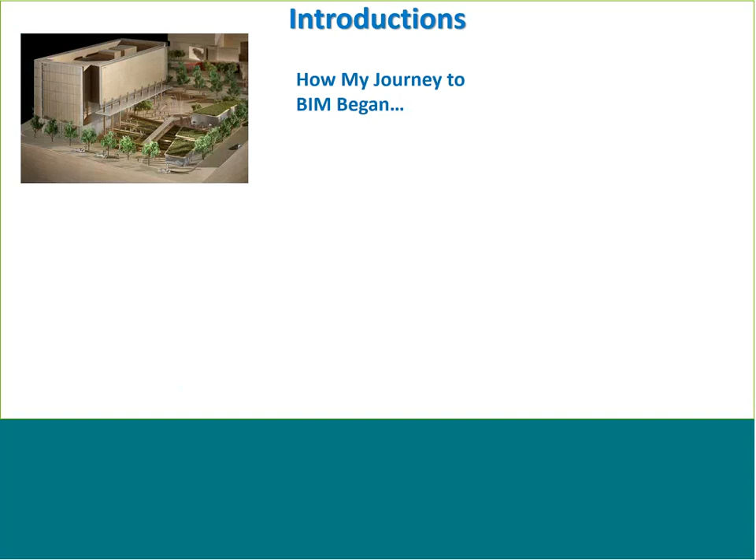When I was a wee one back in my elementary school days, I went on a tour of the local high school just before entering high school, and when I went into the drafting lab—way back then that's what it was, a drafting lab—I saw a bunch of cardboard models, kind of like we see here on the screen, even complete with the little fake green grass and the trees that you get from your local train hobby store. I thought, that is really cool. That's what I want to do. I want to be somebody that gets to make those cool models.

So once I started high school the following year, I began right away on the technical side and started to learn AutoCAD. Back then, it was on floppies. As you can see from that little arrow there, the entire AutoCAD program came on 4 floppy disks.

If you're a wee bit younger and don't know what a floppy disk is, there's a great example. They didn't hold very much information. Those entire 4 floppy disks held less than 5 megabytes, not gigabytes, megabytes of data to put that whole program together. As you can imagine, it's much larger now.

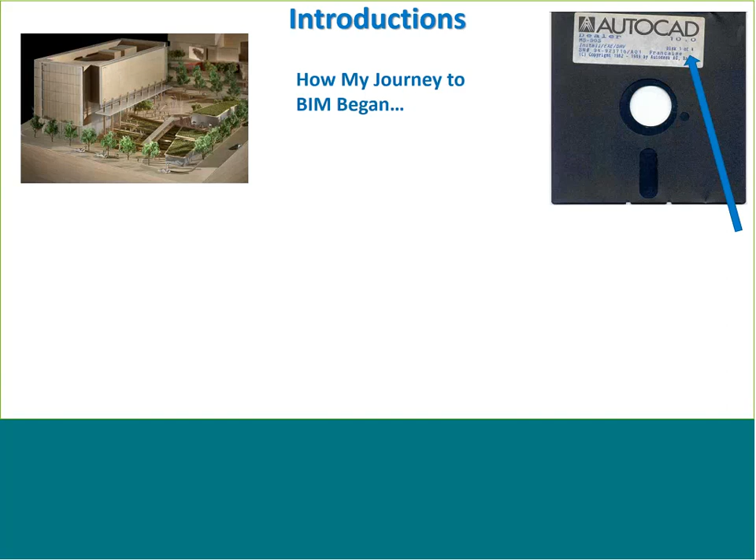One of the other things that I was taken aback by and just sort of floored by with the new school technology we were using was something called a plotter. As you can see down here, back then we used what we called pen plotters, and what it actually did was pick a pen from the little carousel there and draw each line with the pen. This was sort of earth-shattering back at the time.

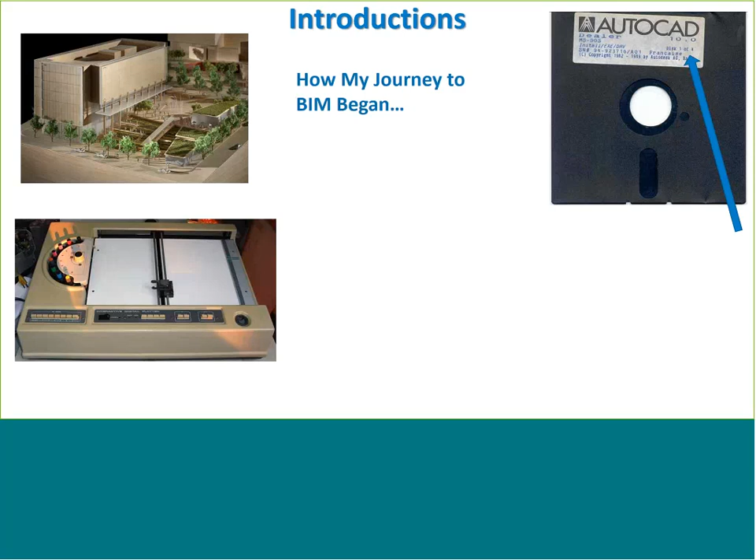The downside was if you happened to have 2 or 3 or 12 lines sitting on top of each other, the pen plotter would actually retrace those lines 10, 12, however many times you drew it, and then you'd puncture the paper. Once you punctured the paper, you'd have to restart the process again. So while it was cool technology, it was slow and prone to having not data breaches, but paper breaches.

The other new technology we were starting with there was a tablet—not the tablets we know and love today, but a digitizer. Instead of having to use our keyboard shortcuts with AutoCAD, we had the ability to pick the little icon for this digitizer, and the particular command we selected would happen right away on the screen. That was sort of super cool technology at the time as well.

Thankfully, the digitizer wasn't around for very long, because then they moved it from the digitizer onto the screen with our toolbars inside of AutoCAD, and we were good to go from there.

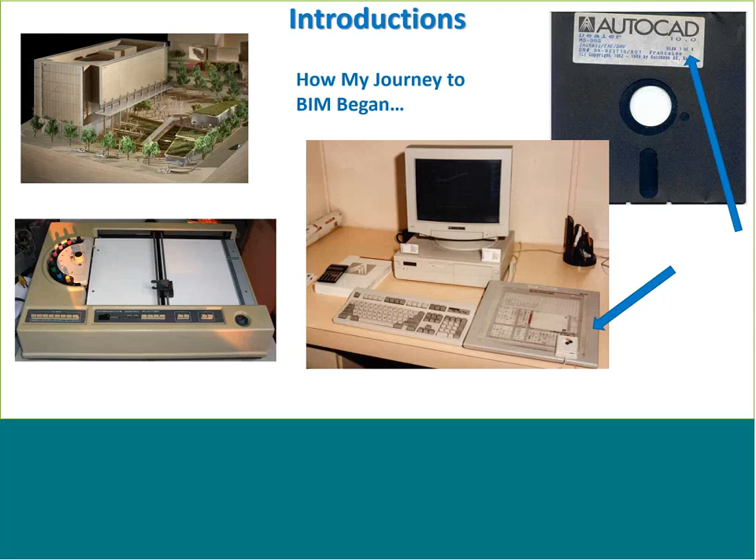So you're asking me, why is Carl taking me on this journey down memory lane to talk about this old, antiquated technology? Well, the reason I did that is because of a disclaimer. The name of this particular presentation is How to Make You a Better Contractor, and I would be remiss if I didn't tell you that I'm not very good with a hammer and a nail or any of those particular things.

And my wife can certainly attest to that.

So with this presentation, I'm not going to teach you how to drive hammers or wield a wrench or any of that stuff, but I do hope that I'm able to lighten your view on the technology that's out there and how that can make you a better contractor in the 21st century.

So some of those definitions that I talked about.

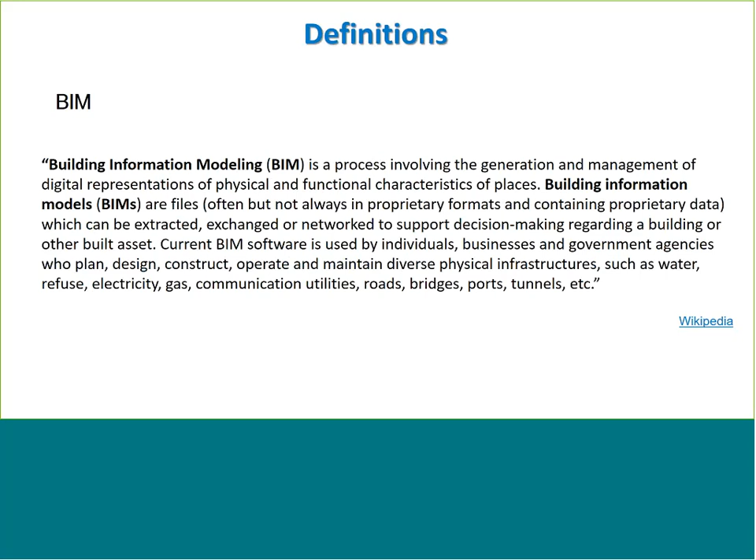So BIM, of course, building information model or modeling, depending on how you use it. You're going to hear this term a lot. It's an industry buzzword, and it's something that's going around the entire globe. So instead of working with 2D plans, we're now working with 3D plans and database-based information.

You may also hear VDC, and in fact I threw this term out when I was running through my bio. What it stands for is virtual design and construction. While some people will sort of interchangeably use BIM versus VDC, they tend to be a little bit different. VDC deals with the actual contractor or construction end of the digital model we're working with, and we tend to get a little more detail inside there, whereas with BIM we tend to start with the design aspect to make that information possible, and it would move into possibly a VDC realm.

IPD, integrated project delivery. This is our holy grail. This is what we're shooting for, where we get all the parties involved very early on inside of a project, the owner and his team. We create some sort of shared risk, shared reward environment, and we all work together for the better outcome of the project, and hopefully a better reward at the end.

And the last one, not necessarily a new definition, but new in the industry as far as how it's being used and adopted more and more, which is design technology. Design technology kind of takes all of that stuff and puts it together. So we're not just talking about working with design models, we're not just talking about working with software like Revit. We're talking about working with all the technologies that come with design and construction, so virtual reality, augmented reality, drones, laser scanning, all of that stuff comes together.

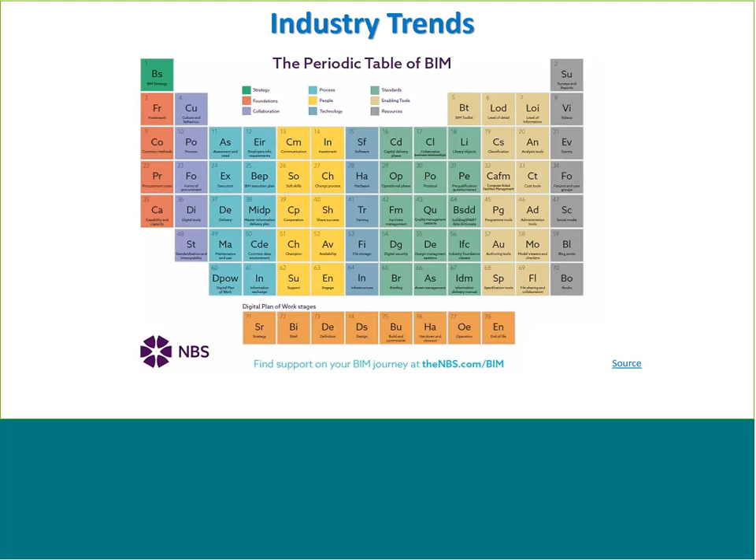As you can see, it comes from the NBS, or the National BIM Standards. They're out of Australia, I believe, but that could be wrong. But if you click the source, it'll take you there, and not only do they have a great article that goes along with this image, but they talk about each individual one. The real reason I like to put this into my presentations and talk about it early on is because of the very first element, BS.

Everyone usually chuckles and goes to the wrong BS definition, which is why I like to see that it pops out that it's actually BIM strategy. And that's absolutely 1000% true. But as you're starting out, you need to make sure you have a strategy working forward, whether we're just starting with BIM, putting our toe in the BIM water, or working on an entire IPD project.

Now, depending on where you are in that life cycle, you may just see your model is just that, just a model. As we get through building, and more importantly get into operations where the owners are in place, we're going to realize that it's just data. The model is great, we can do great things with it, but more important is that information lying within the model and what we're going to do with that data throughout the life of the project and the model itself.

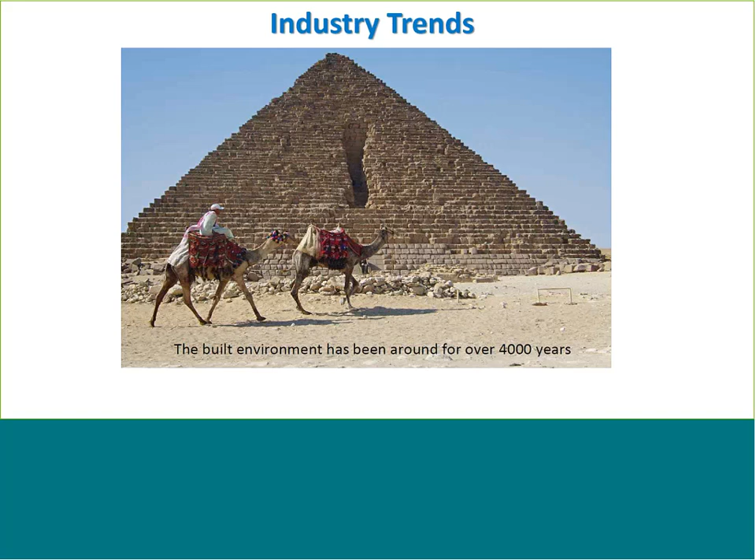So when we're talking about contracting, the way that we build things really hasn't changed a whole lot over the last 4,000 years. We see how the pyramids were built way back then, and they're still standing. They didn't have computers to use BIM, but they had a process where they planned, they scheduled, they executed, and they built. Same general idea. But we'll also see that the way we've done things, even as technology has changed, hasn't.

So we take a look at these images here on the screen where we've got these brick layers over the years and the centuries, and the way that they actually lay brick hasn't really changed much. You'll hear this a lot when we talk about the construction industry in general, how we've stayed the same for hundreds of years. We haven't really had a lot of change. And while that's definitely starting to move, that needle is rising, more technology is coming available, and there's more adoption, it's still quite slow.

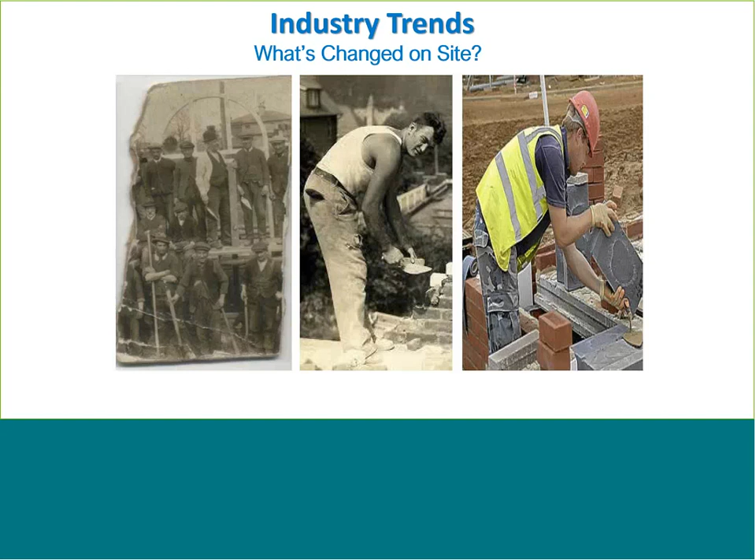So why is it slow? Why don't we change? Why don't we quickly accept this new technology and get on the bandwagon, as the case may be? Well, of course, there's always our friend cost. It's going to cost us a lot of money to make these changes. Maybe it will, maybe it won't. It's all relative to the time and money that it's going to save you.

We just said, our friend time. We don't have time, we're very, very busy. We don't have time to learn new software or new hardware or to take training. And of course, my personal favorite, he says in a sarcastic tone, we have always done it this way. How many times have you run into this when you've tried to implement or bring anything new into your workflow? Well, this is good enough because we've done it this way for 20 years. Why should we change? Well, hopefully at the end of this presentation, you'll have an answer to that question.

So why should we change? In case you can't wait to the end, let me give you a few of those answers right now. Better communication. We are no longer just sending emails or writing things on charts or putting things on clipboards and taking them into the job site trailer, putting them in a file. Hopefully someone takes that file, transcribes it, can understand our handwriting, makes those changes and passes it along. We have much better ways that we can communicate and send information now.

It improves the workflow, and the kicker here, we can start working with the actual data, not a version of a version of a version of something that may be the data that we want. Increase productivity - once we get over that initial learning hump, we will find that there's a benefit for this technology and this workflow, which is why we're doing it.

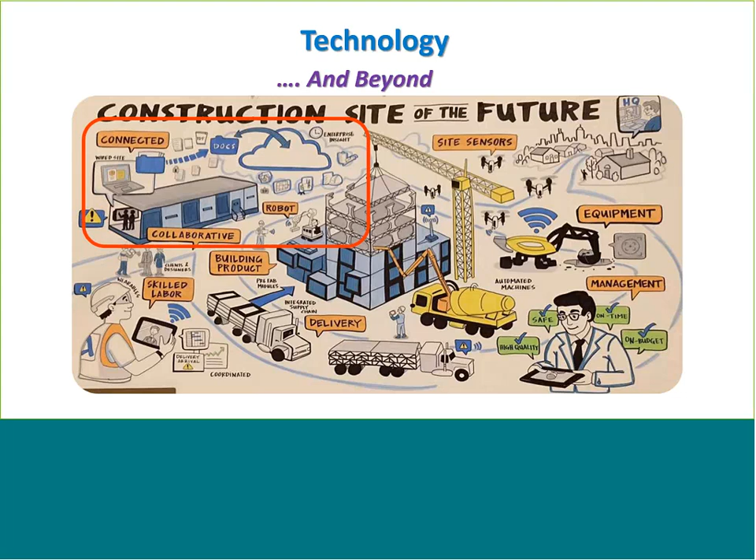And all of that is going to nicely tie this all together and lead us into talking about BIM 360 and why that is going to help make us all better contractors.

So BIM 360, that's only for BIM managers. It's just a bunch of point products with fancy names, and you need a whole bunch of stuff to get it all in one. It's only for contractors. Nobody's going to do it if they're not working with 3D and if they're not working with BIM process. If you're still working with 2D, it's not for you. It's only on iOS, so if you don't have Apple, you're out of luck. And really, it's just glue, right? Like it's just glue. Well, of course, none of that is true.

But those are a lot of things that I run into when I'm talking with people about what BIM 360 can do for them. There's a lot of misconceptions, information that's not quite right, or maybe they just haven't really looked into it.

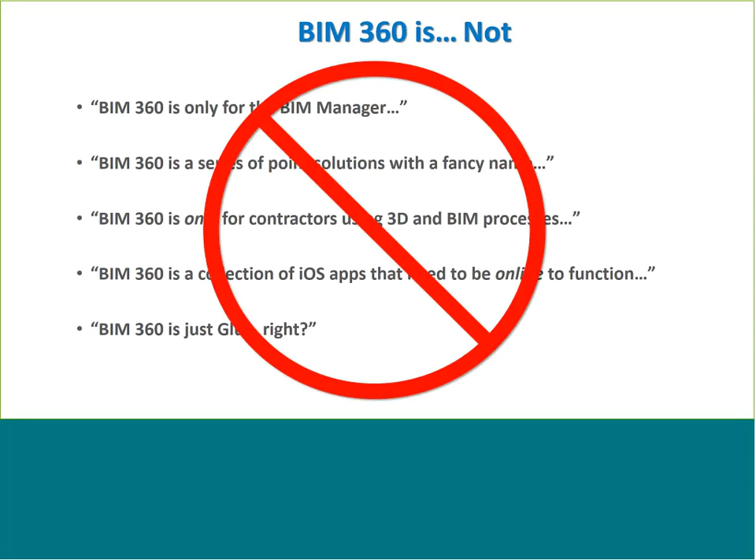So what does BIM 360 do? Well, what it does is it helps give you the ability to access your data anytime, anywhere. Now, of course, there's always going to be tiny caveats to this in that if you have internet, you can access your data. If you're on the field and you have your Wi-Fi connection, Wi-Fi or cellular, and you can access that, then you can access your data.

But even if you're outside of a cell or Wi-Fi area, you can still use this information, and as soon as you get back into your connected environment, you can transfer that data to the rest of the project team.

It's easier to deliver our projects because we have the right data at the right time. We're always connected with our team. We have this database of information that we're working on from the beginning of our project now right through to the end. And as we have more people come into our project, we can provide them access to it.

So we're not reinventing the wheel. We're not sending several different versions of our data. It's all in one spot. And of course, because we're working with data, the underlying information in these models and documents that we're going to be talking about, we can now do analytics.

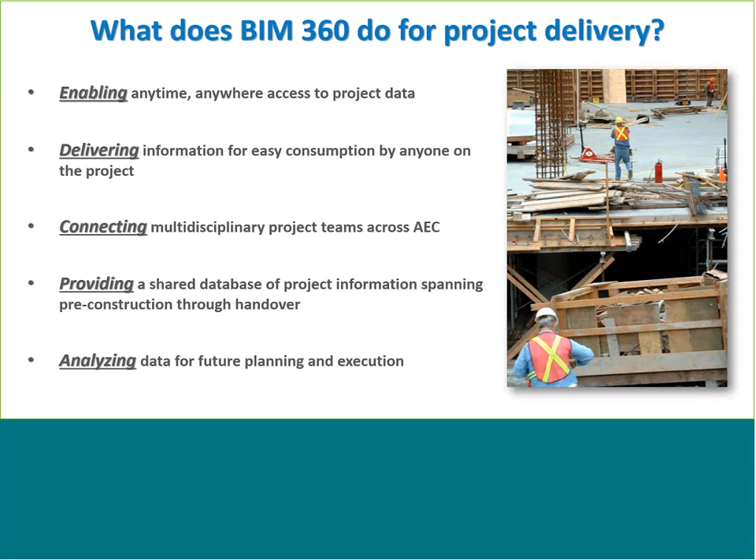So how are you currently dealing with your collaboration, design issues, construction issues, RFIs? How's all that stuff done?

So is it something like this? We have connections where we're using an FTP site, we're sending emails, perhaps we're putting all the information on a USB stick and carrying it across town to somebody else, or maybe we're even a little further ahead of that and we're using a basic client like Dropbox or Box or something like that to store information.

What we want to do is get away from that workflow and move into that central source of truth. A common data environment is a term that you're going to hear a lot, where all of our information is in one location. We know where it is, we know what version we're working on, and we know how to get to it. And also, just as important, we know who was the last person to upload, make changes, or touch our information.

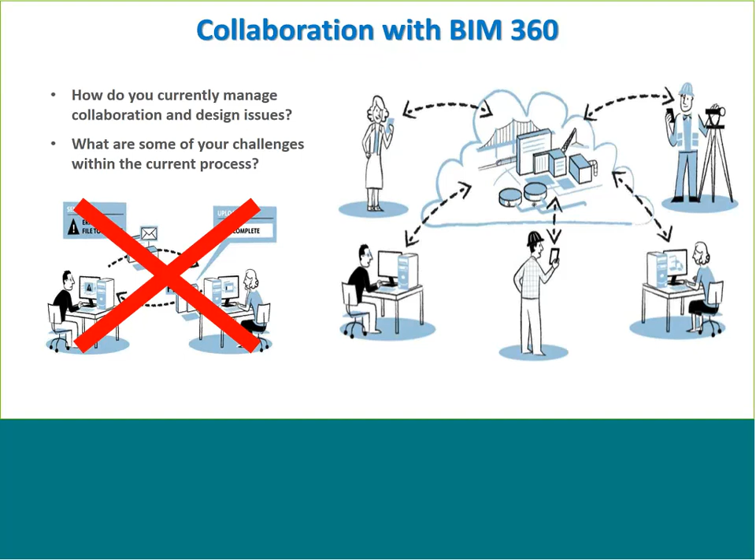So now let's dive into some of the products that actually fall under the BIM 360 moniker. We're going to start with Glue, one of the original products that came out, BIM 360 Glue, as well as BIM 360 Field.

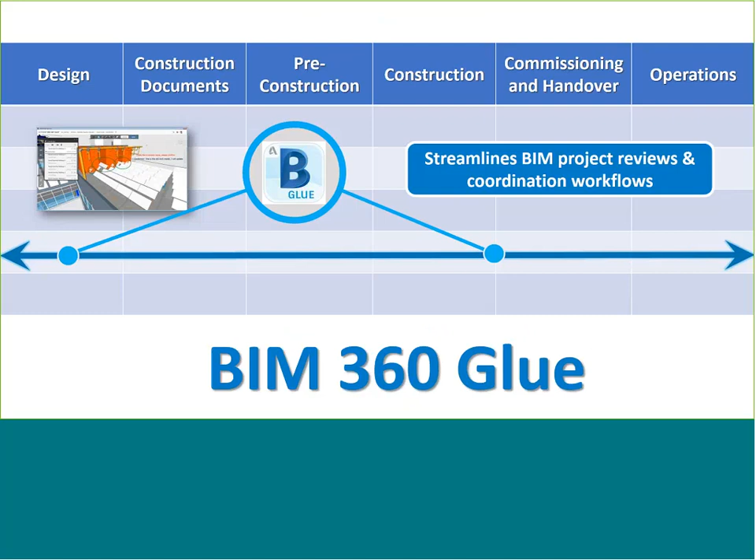When we're working with Glue, it gives us one-click access to BIM. That means when we're working in this environment, whether we're BIM savvy or not, we can simply get an email from someone working on the project, and all we have to do is click that little link. When we click that link, we're taken directly to that particular view inside of Glue and can see what we were meant to see, whether it's a markup or an issue or what have you. We have access to that right away, and we can see it without having to really know how we got there or why. We just click the link and we're good to go.

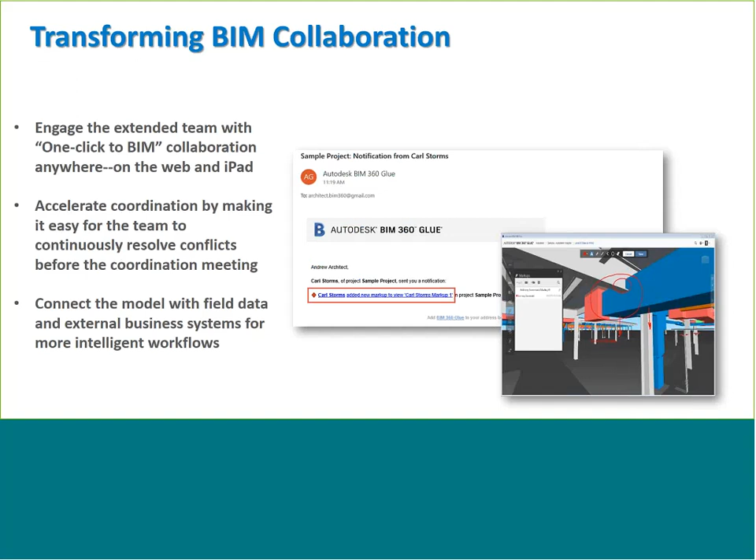We have the ability to see clashes earlier in the project, which is part of that IPD type of thing. If we're all getting together earlier on and finding stuff virtually before we're doing bricks and mortar, building stuff in the ground, we're going to get things fixed at a much cheaper rate. It's easier to change a model than it is to move some beams and some bricks and some mortar.

And of course, this information is available on a mobile platform. So whether it's on our iPad on the site, or on our laptop, or on the computer in our job shack, we don't have to be chained down to our desks in the office now. And even if we're not the ones that created the data—if our consultants from the architecture and engineering world are sending us the data through Glue—we can access it as we need it.

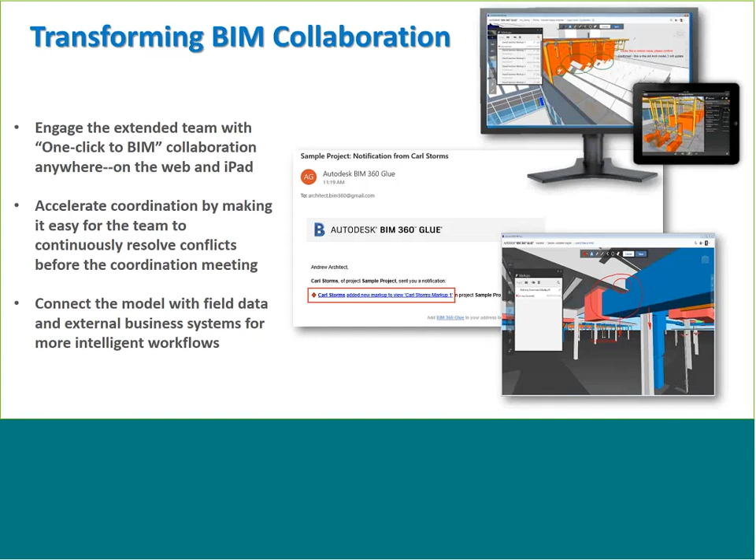One of the other nice things about working with Glue is the fact that it has add-ins. So if you happen to be working with, or your partners on the consultant side are working with, Revit, Civil 3D, Navisworks, or AutoCAD, there's a direct plugin for Glue inside those software packages, which means we can quickly work with that data and make changes inside of that platform. In this particular slide, we see there's an issue with a Revit model. They'll get a clash notice from Glue, make that change, save it, and from right inside their authoring tool, send that information back up to the Glue project.

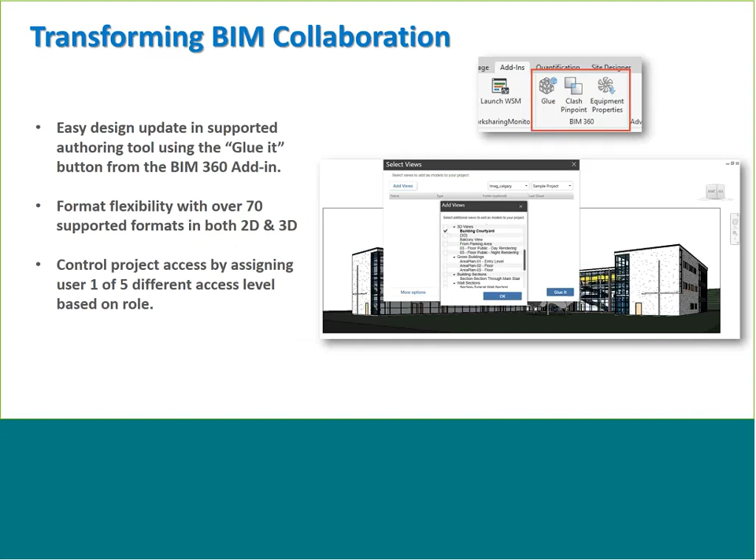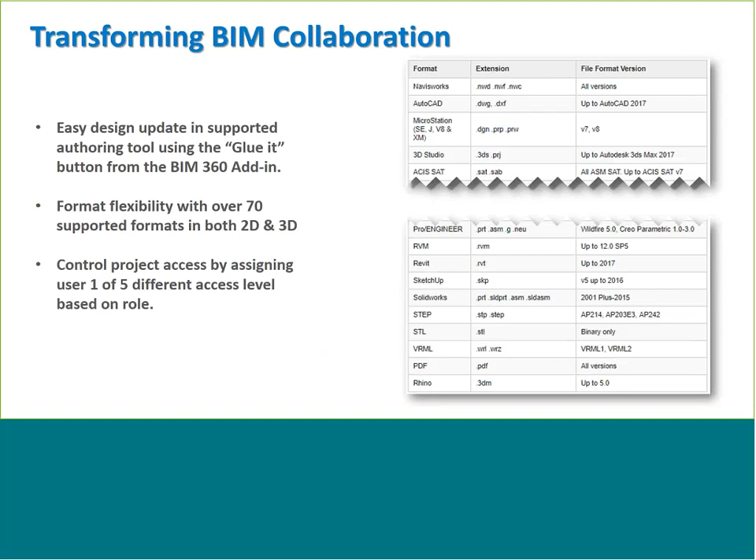We also support several different types of data, very similar to working with Navisworks. There's a whole bunch of different data types that we work with, so we're not just talking about Autodesk platforms—we're talking about a lot of 3D platforms that are out there that we can work with. This is just a partial list of what's available. As you can see, it's not just 3D information that we're working with. And of course, we have the ability to control access to who's working with what inside of our project, so that's always nice to know that we have that ability as well.

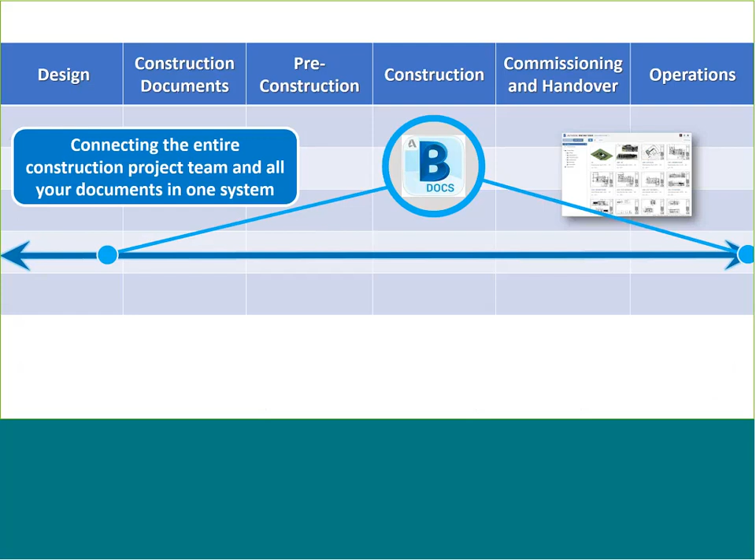So now let's take a look at BIM 360 Docs. Here's where Docs sort of resides inside of the workflow. This kind of almost touches the entire life cycle, and as we see, will be the backbone for the BIM 360 platform moving forward.

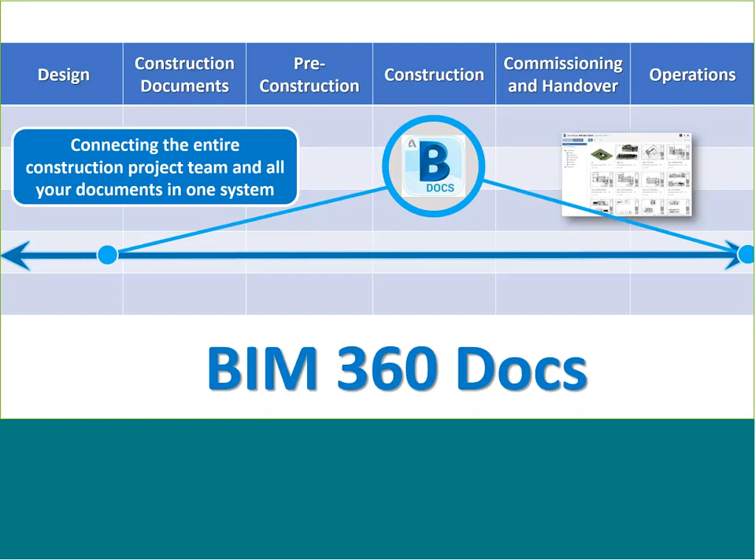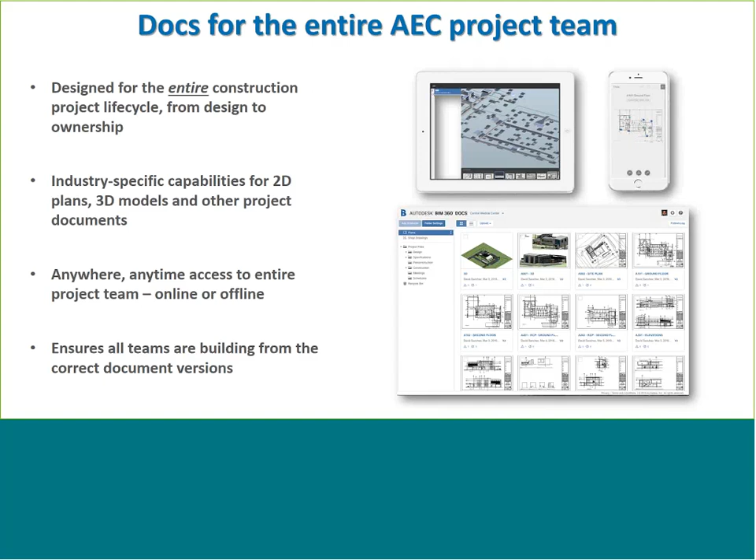What this allows us to do is get everybody involved in the project. We have access to our information on our mobile devices, access to our plans as well as our models working forward - again that same anytime, anywhere access. More important is the fact that all this information is stored in one central location, so you understand what's been done, what's been changed, who changed it, and where it's located. And even though we see a couple of Apple products on the screen, it's not just an Apple interface - it works with Android as well when we're talking mobile.

Again, the big thing, and we'll touch on this later on in the video as well, is that single source of truth. So we understand where everything is, where it belongs, and where it goes.

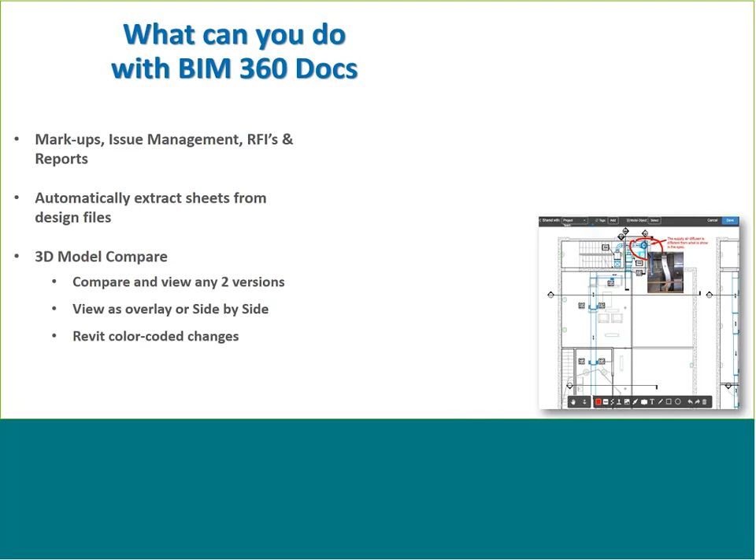But what can we do with it? Sure, it's great to have this one spot where we can store all our data, but I can do that with Dropbox, Box, Google Drive, what have you. But this is more than just a place to put your stuff. We have the ability to manage issues, put in our markups. We can do all this stuff in this project environment so everybody can have access to it and see we've made those markups or have issues. You can even see that we can add pictures in there as well.

If we're working with some of that direct authoring tool, so in this case Revit, PDFs, or AutoCAD, when we upload those models into our BIM 360 Docs environment, we can automatically extract those sheets. That means the people on the team who have to go to the Revit file and print it out to PDF, or even just share the model out, don't have to separate all the sheets, which is a very laborious process. We can just upload that content directly into BIM 360 Docs, and it does it for us automatically.

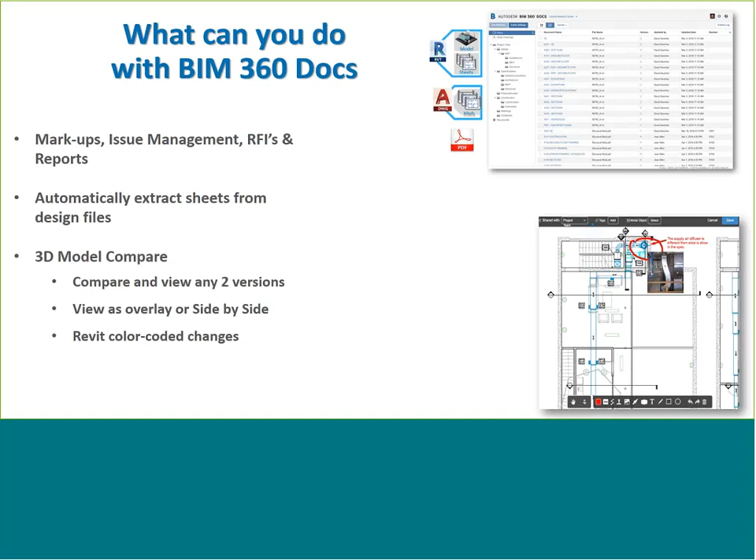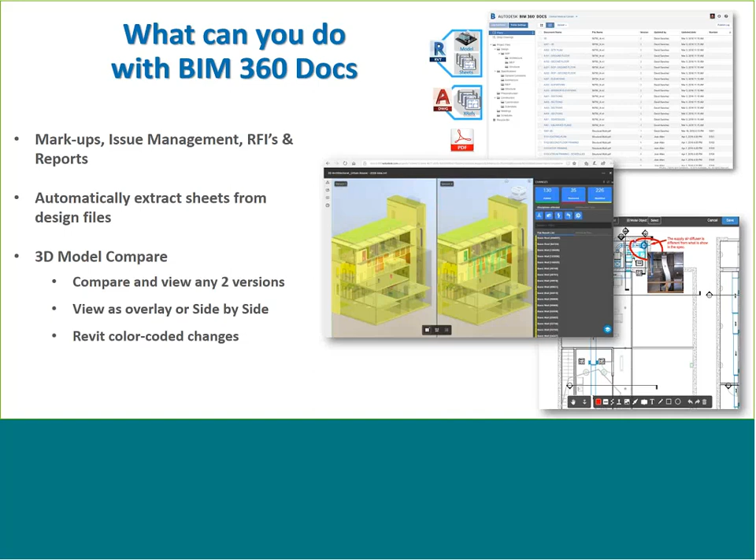We also have the ability to compare. A lot of you may have worked with a product called Bluebeam, a great PDF product where we have the ability to get two versions of a PDF and compare and contrast what's changed and what's different. We can do that inside of Docs natively. We have the ability to compare in 2D, but also in 3D, which takes it up to that next level, because not only do we see what's changed on the plan view, but we're looking at it in 3D, so some things we might have missed in a plan view we can now see in a 3D compare and contrast. We have the ability to not only do a compare side by side, but also do an overlay as well.

BIM 360 layout. So this is actually a free tool - you can't see me, but I'm doing the air quotes. And the reason I'm doing the air quotes: the layout portion, or the app that comes for your iPad, is free, but it does require a paid subscription to Glue to support the content on the back end.

So what layout does - and again, we need our big brother Glue to play in the layout sandbox - what layout allows us to do is take our 3D information, or 2D if we're still in that workflow, for example from our Revit model, and apply points into that data. From those points, we can now go do layout with our total station or robotic total station directly from an iPad.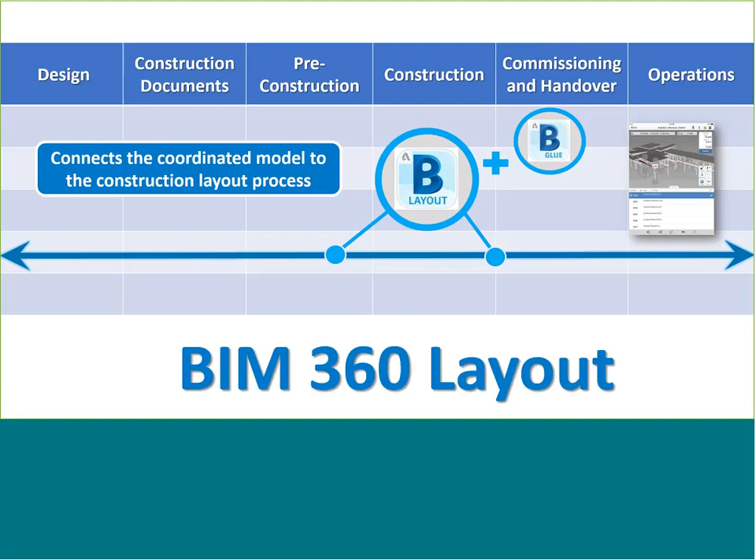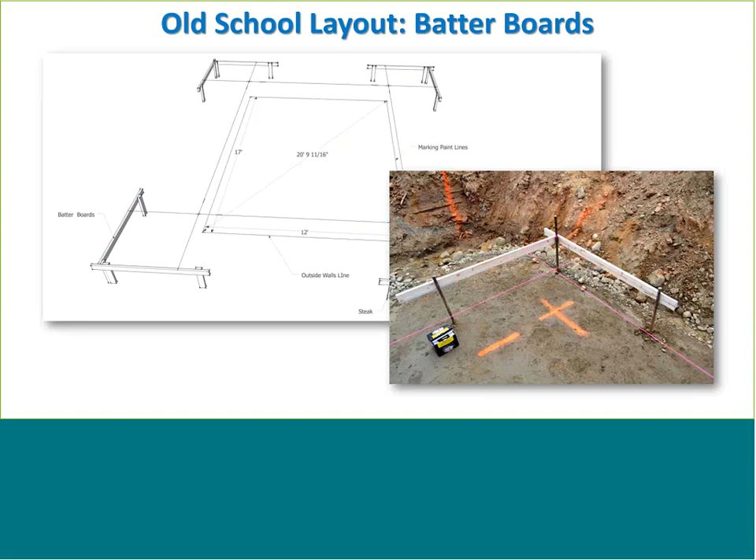The old school way - a lot of people are still doing this - batter boards, we lay things out, do some cross measurements, and make sure where we're going to dig before everything is in place. You can see there's a lot of rebar, a lot of orange paint. So what we want to do is get away from this workflow. Well, it's worked for a long time, but it's still very error prone.

So if we move into the BIM 360 environment, we're able to do this with our iPad using the actual design model, in this case a Revit file we built from. We're not as separated from the data, so there's not that chance for error as we're moving from one data source to another.

And we have the ability to do step-by-step guides. The iPad will make sure we're in the right location with our total station. We can look at our information in 3D or 2D so we can understand it the way we need to when we're actually in the field. And it gives us those cues - as we're moving our device to the right spot, it lets us know with a beep, a little flash, that we're getting closer and closer. We're on the right spot. We've got the point.

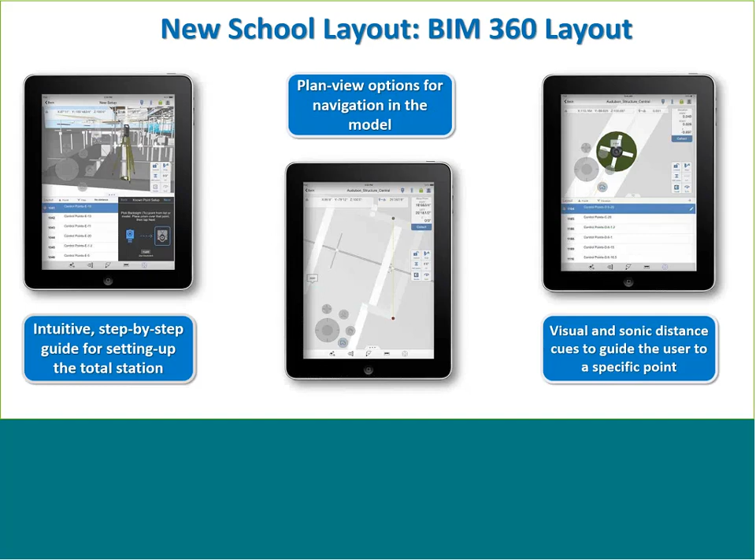And one of the things we can do with this, besides being able to do layout, is also QA/QC of work that's already done or work that's going to be done. So we can create our content inside of the products we have here - Revit, AutoCAD, Navisworks - as well as with point layout.

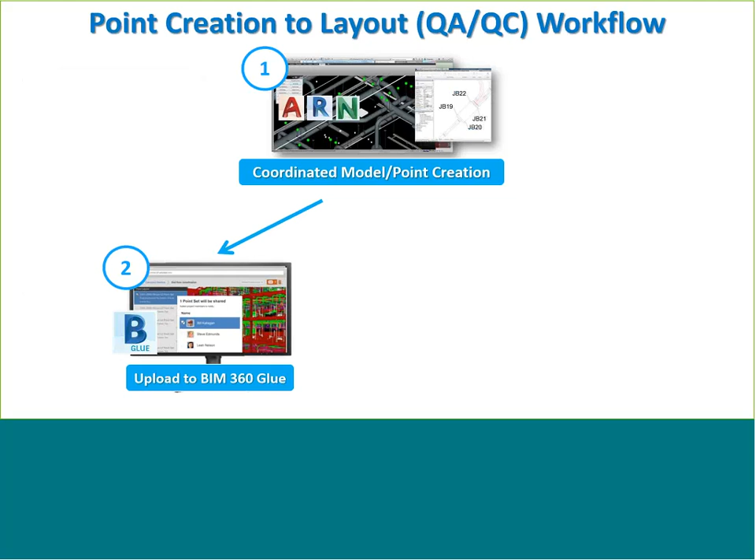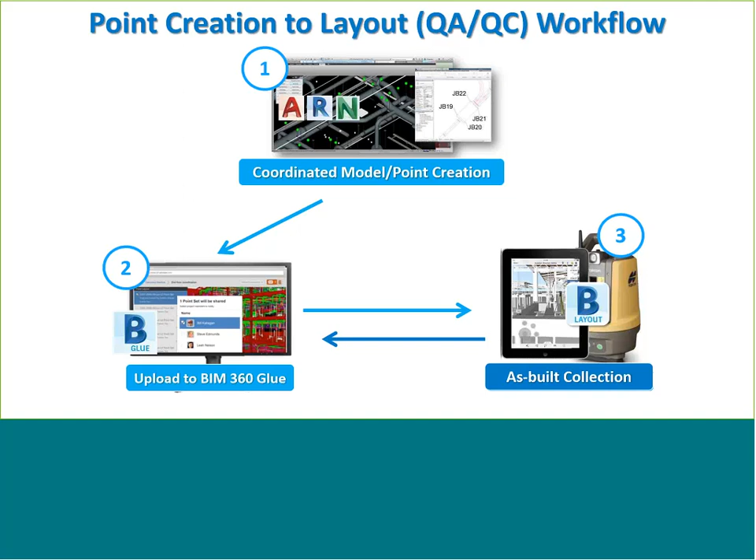And then we take that information from that product and put it into our BIM 360 Glue environment. From there, we input it into our layout tool, BIM 360 layout, on our iPad, which we can connect to our device. Right now we work with Topcon, Leica, and there's always a third one I can't remember - if you go to the BIM 360 layout website, Autodesk will tell you that third tool it works with. And then once we've got the information, we can turn around and say, okay, this is where the point's supposed to be, everything's laid out, it's built, and we can go back and do the as-built workflow, where we say, okay, that's where the point's supposed to be, but this is where it actually is.

We can also do this with analysis once we've got the information. So again, we take all those issues, things that were supposed to be in one point and they're not, and now we can put that information into Field instead of inside of Glue. And from there, we're able to go to our site and track that as part of issues.

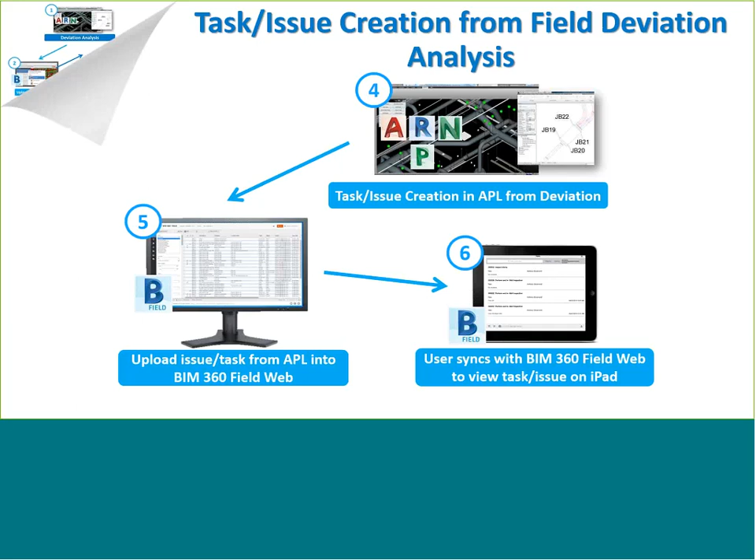So after we've gone in, used our layout command, let's say, to put all of our hangers for our MEP systems in place, we can then take that data, put it back into a product like Field, apply it to a checklist or punch list, and then we can go back and QA/QC that stuff on our iPad in the field.

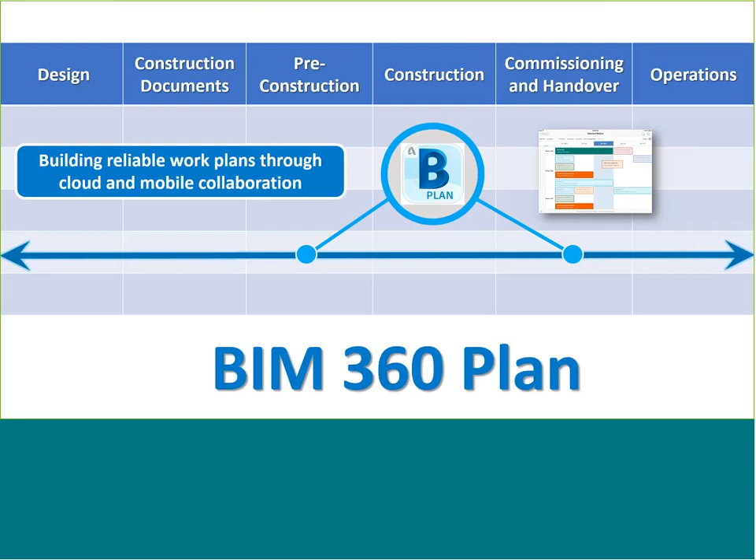Plan, or BIM 360 Plan. We can see a little bit smaller window here, typically on our construction side, a little pre-construction, a little commissioning and handover. But what this allows us to do is have sort of a digital representation of that pull planning, of that lean construction methodology, where we don't have to take all that time to put the tape on our whiteboard and put all our sticky notes on there. We can now do this on our mobile devices and then track all of that information when it's done. No more hard drive full of pictures from weeks on end of our job board. And as we move our stickies around, it's now a mobile environment where we can track that information.

It's not really meant to replace Microsoft Project or Primavera to do your entire schedule. It's more to take it down to your little 1 week, 2 week job window areas and chunk by chunk create that project as you're moving forward.

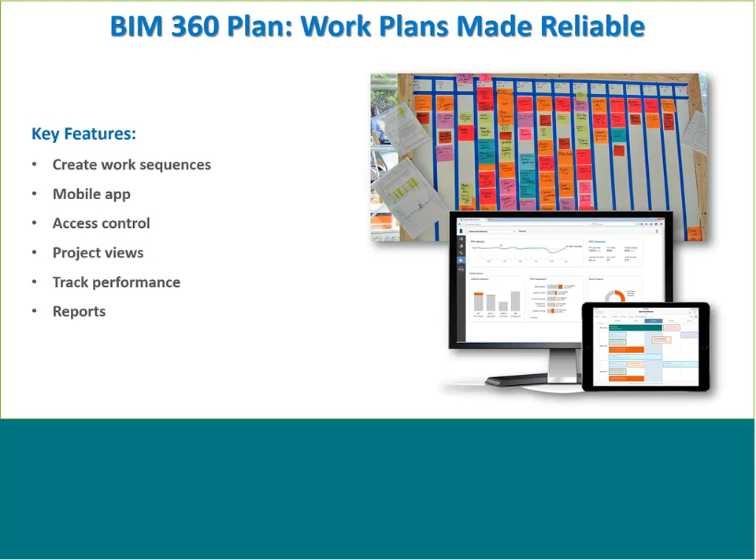So some of the things that we can do specifically, to zoom in on what we have on the screen, again, short-term planning, we can track all this stuff. We have that lean principles if you're working with a lean project, which is becoming quite popular these days to do that in place. This subscribes to that theory, that methodology, and you're able to work that in quite seamlessly.

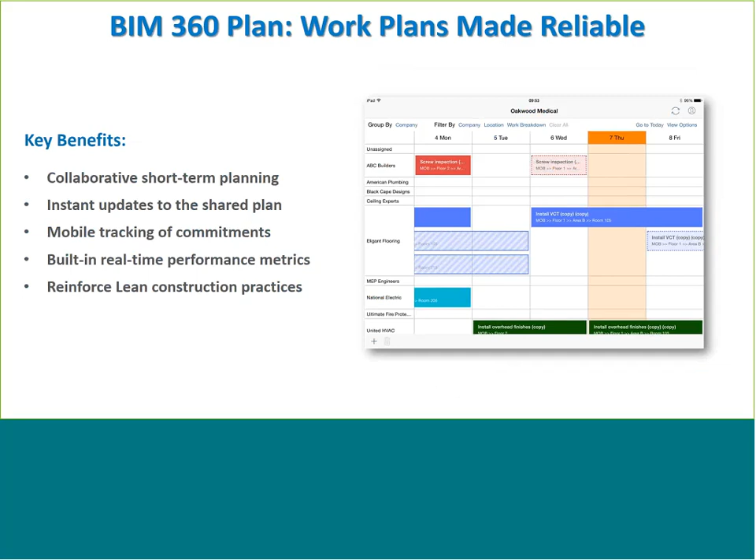And the last one that we'll look at from the BIM 360 realm before we kind of wrap up is BIM 360 Field. So BIM 360 Field is another one of those sort of original products that came out right around the same time as BIM 360 Glue. And this puts us firmly in the contractor's hands. During construction and commissioning and handover, it's a real QA/QC safety tool, checklist, punch list, all that stuff can be done inside the BIM 360 Field tool.

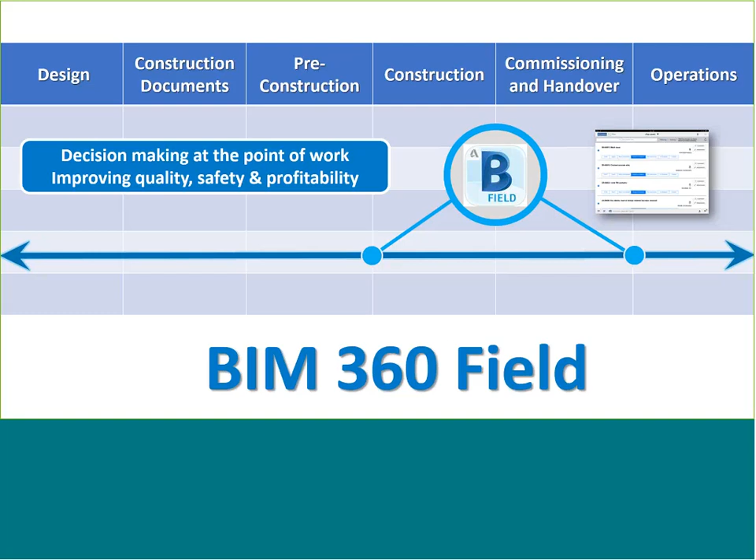And what this does is it allows them the ability to make sure that what needs to get done, what needs to get tracked, what needs to get reported can do so.

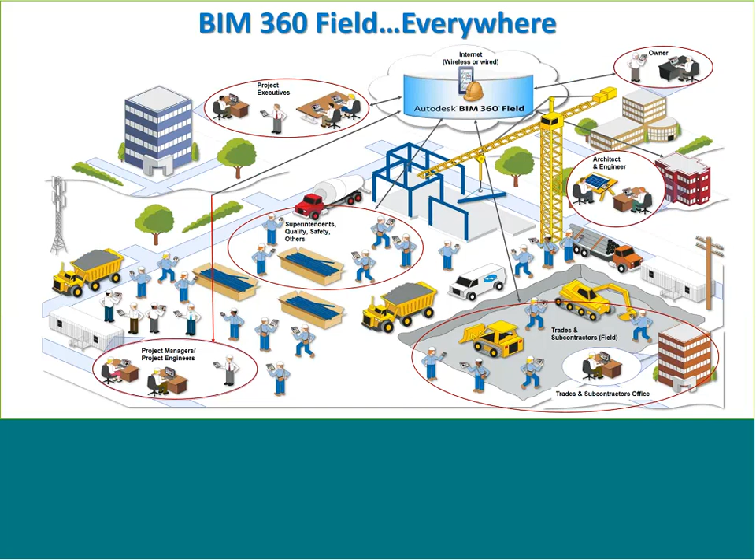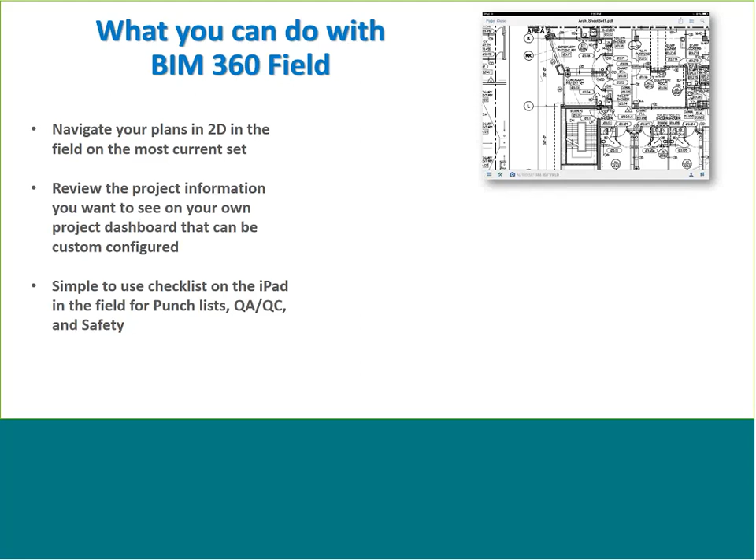And so this allows us to do a lot of things. One, and this is a big one for a lot of people that are looking to get started working inside a BIM workflow, is sometimes it's a big step. And when you're going to go on a big journey, you start by taking that first step. Perhaps it's working a mobile device like BIM 360 Field that allows you to do punch lists, QA/QC on a 2D plan that you're used to working with. So yes, we're going to get to BIM, yes, we're going to get to 3D, but we can start right away with a workflow we're comfortable with, this app doing 2D inspections.

We have the ability to review all the information that goes into our projects. So 1 project, 2 projects, 3 projects in, we now have a database of information that we're working with. And if we see that we constantly have this one sub that's underperforming, we now have data, empirical data that says, hey, we shouldn't use this particular trade because they're always behind, they're always late. Perhaps we should try a different trade for that particular workflow.

And one of the coolest things when we're working with BIM 360 Field is the fact that when we have our iPad, we go out into the field and do these checklists, we're not always connected. And if we're in a field where there's a dead spot, there's no 3G, 4G connectivity, we don't have a Wi-Fi mesh on our job site, we can still use the checklists that we're supposed to do that day.

We still do our workflow. We walk through, we check off our checklists, we go through, we stay productive, and at the end of the day, as soon as we walk back into the job site trailer or into our truck or wherever we have connectivity, it syncs that information back up to the project team so everyone who needs access to it has it. We don't have to put our clipboard on the desk for someone to transcribe that information into the project data.

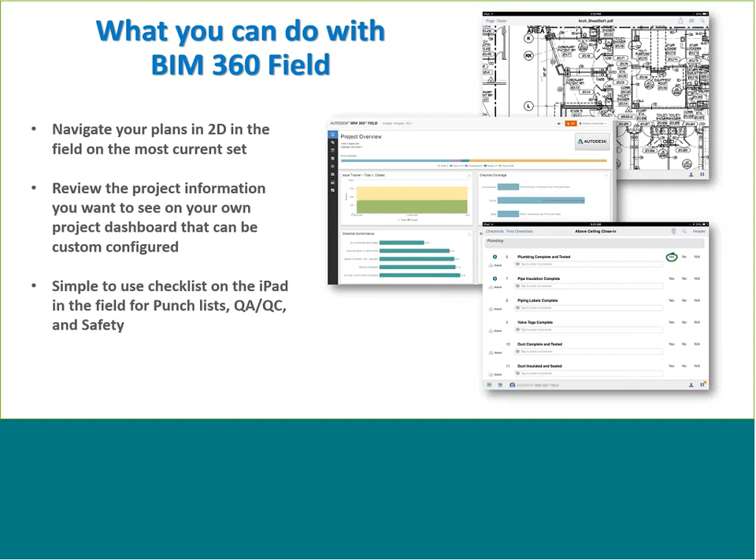The information happens instantaneously. The other nice thing about working with an iPad is it has a camera. So when we see an issue, we can take those pictures right away, put them into our reports, and as that information gets synced, the pictures get synced too. We no longer have to use a digital camera where we take the SD card out, put it on our laptop, transfer it to a folder—there are more and more places where there can be an issue with the data and errors along the way. If it's all in one spot, a lot of that goes away. We get better, cleaner data, and we get it sooner.

Speaking of pictures, not only can we take those pictures, but we can add markups and comments directly to the picture. And you know what they say, a picture's worth 1,000 words. So we can type out what's going on with the issue, but we can also take a picture and add to it.

Now, a little caveat as we go through here—if you're working with this on your iPad, you do have connections, either 3G, 4G, or a Wi-Fi mesh. You have the ability to use the Siri integration, which means you don't have to type. You can just talk: 'Hey Siri, there's an issue with this duct in room 305, it needs to be dropped 3 inches.' Siri types it up, puts it on your report, or adds it to the picture. You're off to the races.

We also have the ability now to bring in our daily weather. So when we're doing our daily reports at the end of the day, we can incorporate this automatically. You don't have to remember what the weather was like, what's going on, why we're behind. Well, it rained for an entire week, and here's the proof—I have the weather data for that entire week.

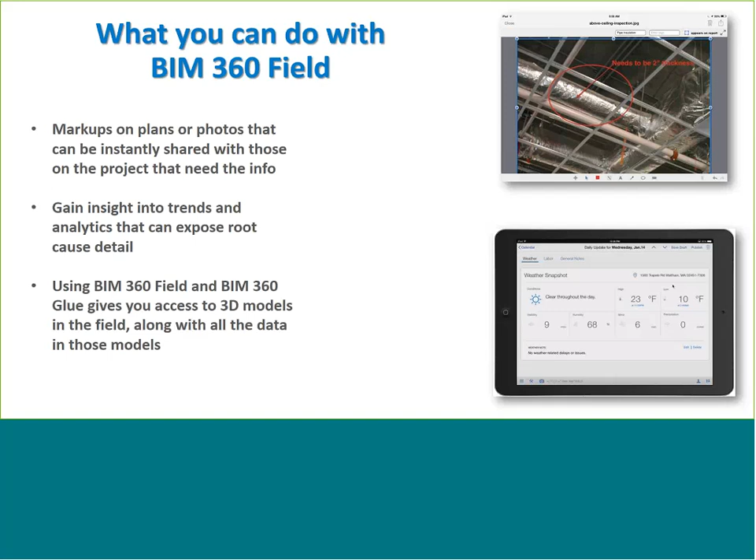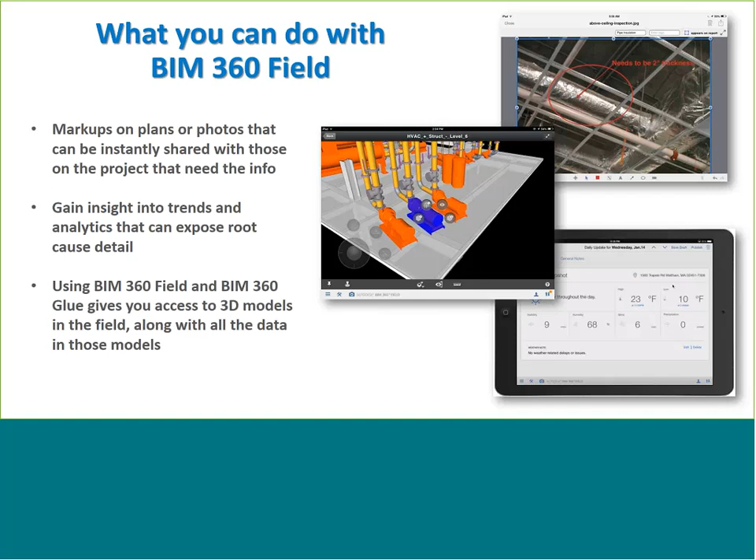We also have the ability, once we've worked with Field and like the 2D workflow, to get into our 3D workflow. What we do is partner Field up with BIM 360 Glue as the back end and the engine that controls the 3D models. And we now have the ability to do all of our inspections and walkthroughs on the site and incorporate that information into our 3D model.

So to bring all of this back together, for the BIM 360 Field world, it's for the entire construction team—not just the people on the field doing QA/QC. Think about doing your CA as the designer. We can manage all of our project documents, safety documents, field documents, process reports, commissioning and handover.

As we put those chillers in place, those boilers in place, we can track when it was placed, when it was run, when it was second tested, third tested. We can even incorporate the PDFs for the owner's manuals for those things. So when we're done, we just hand the entire thing over to the owner.

And really, that's kind of it in a nutshell. The big thing is the real-time project analytics that come with it. You are going to start getting analytics instantaneously. The longer you run through the project, and the more diligent you are with the information, the better that information is going to be.

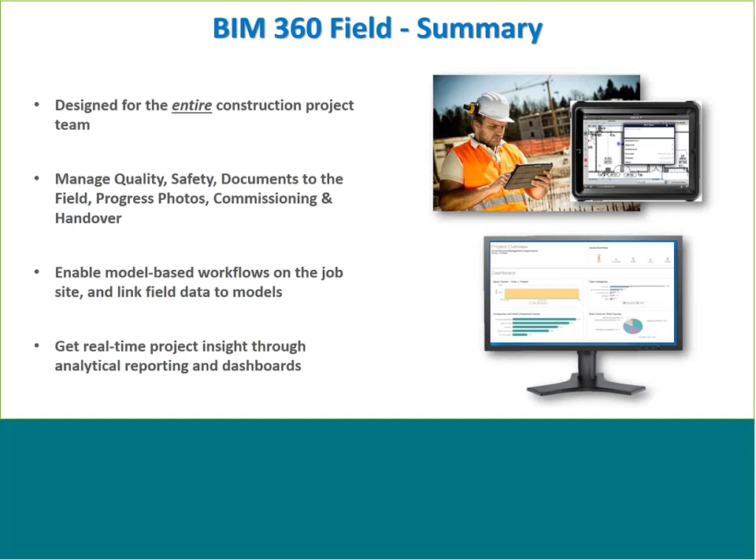So to bring it back for a summary: BIM 360 is a connected environment. We bring everything together—it allows us to put all of our ducks in one basket. We have the ability to have our office and our field always in sync. So those working in the job trailer and those working back at the head office with the models, content, and information—all the information is in one spot. We all know we're working with the most recent version of the information, so we're always on the same page.

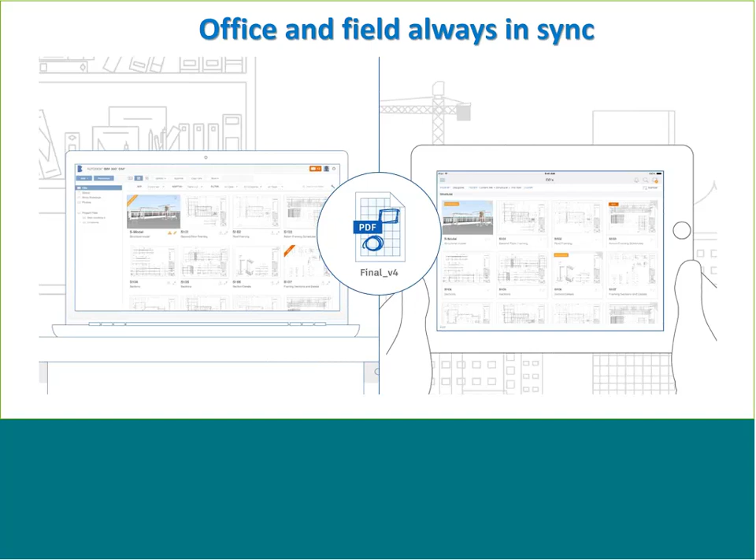And it really is designed, BIM 360, the ecosphere, for the entire construction project. So it's not just when we're actually digging the holes, it's not just for when we're designing the building, and it's not for when we're handing the building over to the owner, but it's for all of those things.

So the big question on everybody's mind is what's next? Well, what's next is it's going to be an even more integrated project, a more integrated platform. It's going to be data-centric, so we're going to focus on the data, the ones and the zeros, and less about which type of information we're getting, whether it's coming from Revit or Tekla or where it's coming from. We just want the data that's inside of our models, inside of our BIMs.

And the way that Autodesk is going to do that is by setting everything on top of the Forge platform. Now, Autodesk announced that they were coming up with the next generation, or next gen BIM 360, last year at Autodesk University. And the reason I showed you all of the original products, or classic as we like to call them, is they're all still viable, they're all still out there, they're all still solutions. But as you're working with those and getting comfortable, what's coming? Here's a quick short distance future look at what's coming.

So in the new BIM 360 world, the products are all going to sit on top of BIM 360 Docs. That's going to be your common underlying central source of truth. And then we're going to set up different modules that are going to work depending on the stage of the life cycle of the project you're in. BIM 360 Design, which is replacing BIM 360 Team and Collaboration for Revit, is going to give you the ability to do your design work.

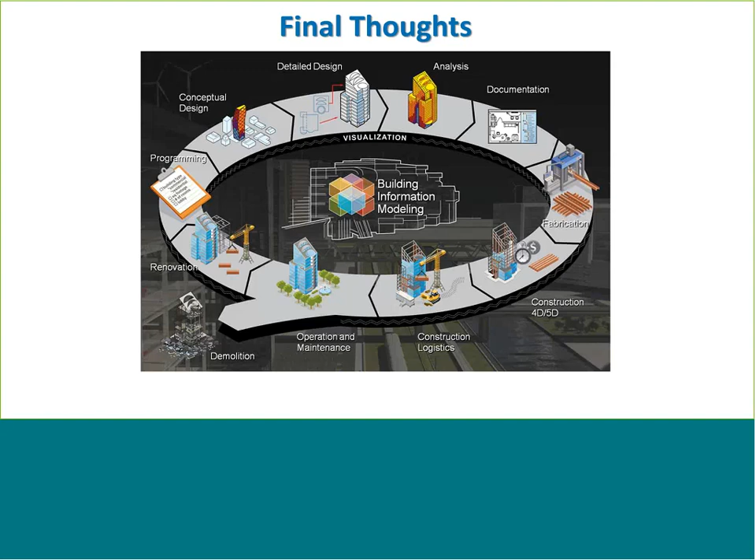But I want to reiterate the idea that what we're dealing with BIM and with the content that we get is just one source of data, and that it really is the data that we're focusing on. And we saw that a couple of slides back where we said what's next, what's moving forward with the BIM 360 platform and the industry in general is that we're going to become data-centric. We're going to be focusing on the data and less concerned about the platform, where it's coming from, where the data was made. We just want the information that's inside of it. And that's why we really need to focus as we're moving forward and adopting these new tools that while a particular platform may be great, it's really the data that is going to carry on through the life cycle of our project.

And with that, I'm going to go ahead and open it up to questions.